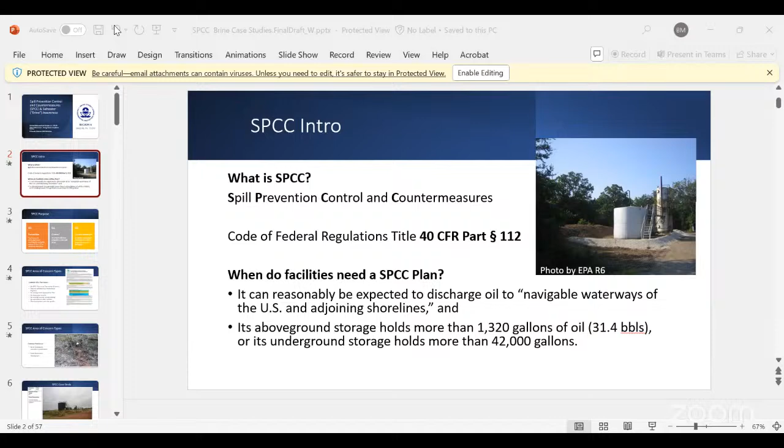You know what I mean? Yeah, I had it turned off in Zoom. It's shut off right there. Back to the screen. Are we better online right now? I think so, okay. Raise your hand or something in the meeting so we can stop. So I think it's yours, Zoom, actually. Muted, or is that phone up here? Or do you have a laptop? It's pulling from right there. Okay. We're using this for the audio, okay, so it's got to come all up. We're using this one speaker right here. Okay, perfect. Well, yeah, just stop us if it gets too much noise in that Zoom meeting.

So what is SPCC? It's the Spill Prevention, Control, and Countermeasures, regulated under Title 40 CFR Part 112. When do you need an SPCC plan? There are two reasons: if your facility can reasonably be expected to discharge oil to navigable waters of the U.S. and its adjoining shoreline. So any water body that usually holds water year round, those are going to be the water bodies that you're going to need an SPCC plan for sure.

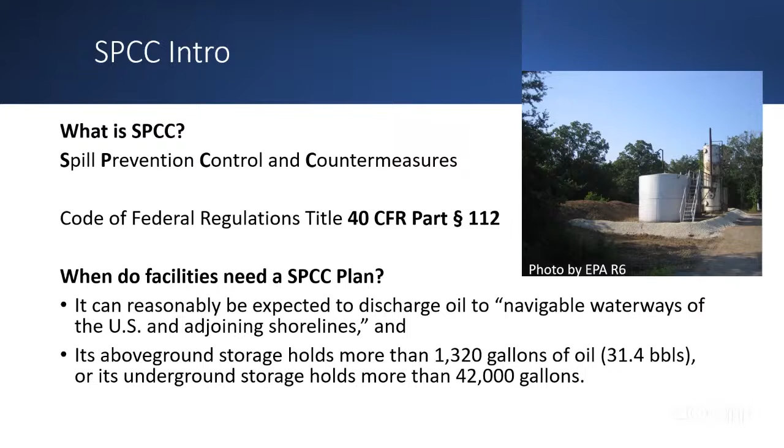And then the ones that are closer to water that's not year round, that's when you're going to have to reach out to the SPCC plan writer, or you can reach out to us as well. The other reason for having an SPCC plan is above ground storage that holds more than 1,320 gallons, or underground storage that holds more than 42,000 gallons. If y'all have any questions, just raise your hand and stop me while I'm talking.

Yeah, there's some that you might have to click twice though.

So the purpose of having an SPCC plan is prevention, control, and countermeasure. Prevention, to prevent oil discharge from reaching the waterway; control, to ensure you have an effective response—say you do have a large spill and an OSC from EPA comes out, they can pull up that plan and know where to respond to the spill, clean it up, and use different locations to clean up, which will be cited in the SPCC plan on where your gathering points are going to be; and countermeasure, to ensure proactive measures, hopefully eliminating having that spill in the first place.

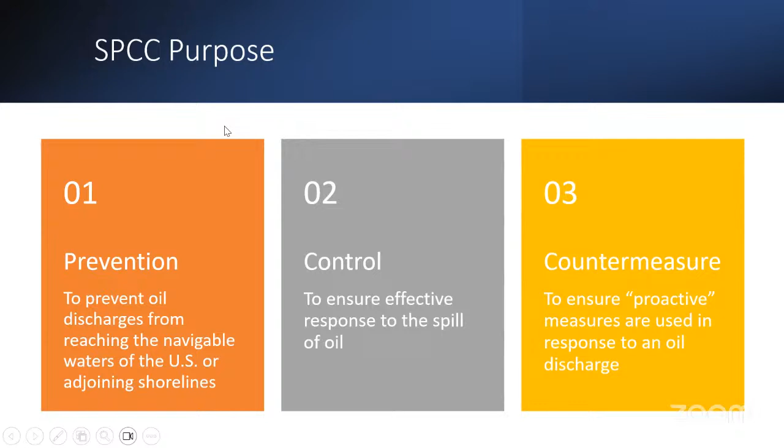So now I'm going to dive into some issues that we see with the plan. Common issues we see are no plan on site at all—we'll show up and they won't have a plan. Usually most SPCC inspections are announced inspections, so they'll give you a call around two weeks ahead of time so you can get your plan set up, and usually they want it sent over to them to review the plan within that two week time frame.

But if you don't have it yet, you have those 2 weeks to get it at the facility by the time they're inspecting it. And then, plan not certified by a PE - later on in these slides I'll have a link to a template plan you can fill out, but you'll still need to get it signed by a PE by the time we inspect it. And no management approval for the plan - that's just a signature you put on the plan. So as long as you go through it all, read all the steps, and get it signed everywhere you need to, that's a small thing we see all the time.

And then records - you have to keep these records, and it states in the plan, for 3 years at a time. So the previous 3 years you have to have records. This one is no inspection record, so that's just a walkthrough. If you're out there every day, you can just choose random days to do an inspection on yourself and have that in your records. Just keep the previous 3 years of that.

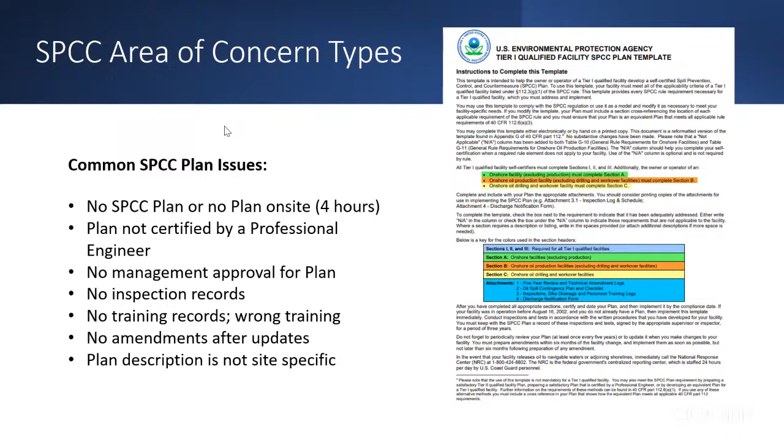Now we'll go to some field issues that we find, and that's no or inadequate secondary containment. A lot of times whenever they're coming to pick up oil, they'll walk over that berm and you'll get a low spot over time, so keeping that low spot filled in before you get an inspection is a big one. Or they'll completely back over your berm to pick up oil and knock your secondary containment down over time. So that's two things right there.

And then having this open drain valve here, this is a big one. This is kind of why we're in the area, with these drain valves you'll have saltwater discharge come from it, or if something happens at the facility while you're not there, you'll have oil come through that. So in the regulation, you have to have it capped with no drips or anything coming from it, and usually you'll have a valve on it too. So as long as that valve's closed and it's capped, then we're all good on the SPCC side.

So if you don't have one of those, you're just doing rainwater by using a pump. That has to be written every time the rainwater is pumped out over the firewall, not back into the system. Yes, I know it'd have to be documented, even though it's just rainwater. Yeah, and that would be something you'd fit in the plan - how you get rid of water from secondary containment. You'd say you pump it out and you're visually inspecting it as you're pumping it out.

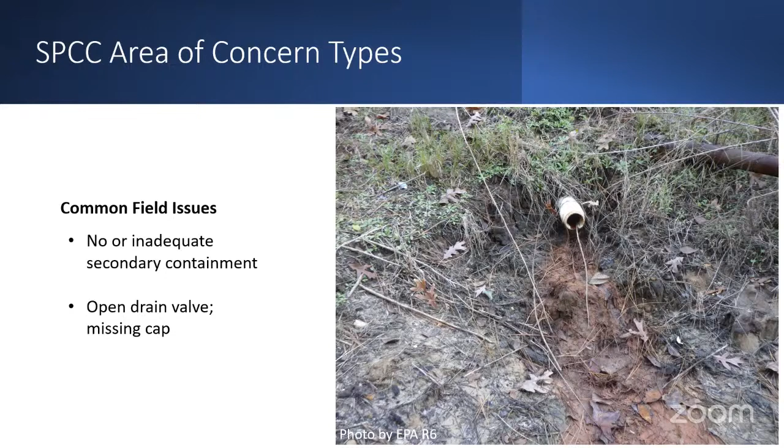Now I'm gonna jump into a case study. This one was in Oklahoma and it just shows a few different ranges of what we're looking for. It'll actually have a checklist on the right side on some of these slides, showing what we marked on the actual inspection checklist versus what's in the picture.

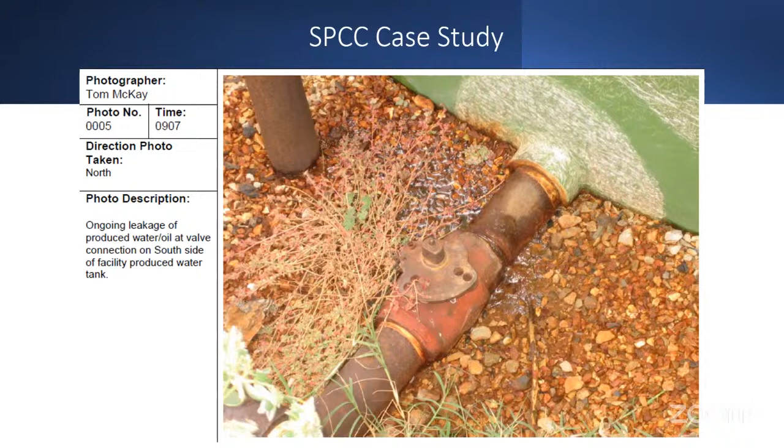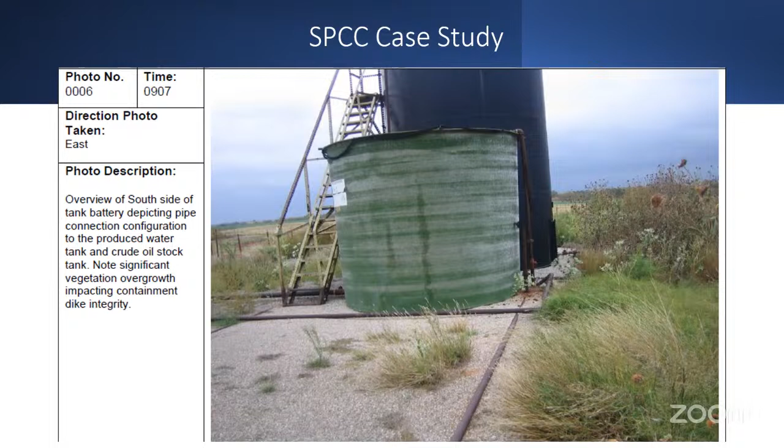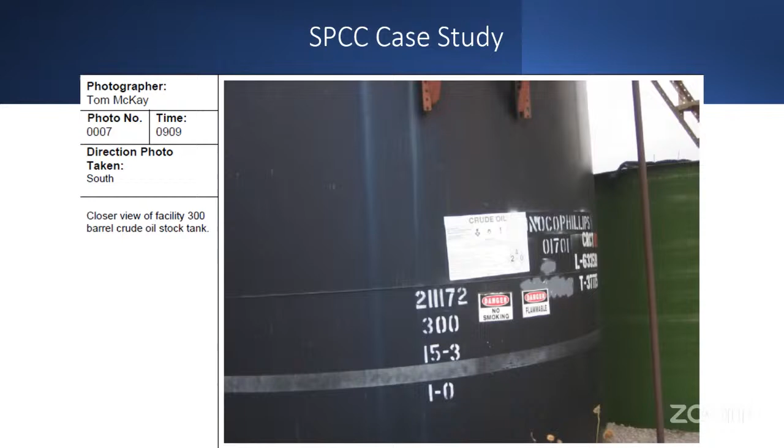We'll look at the largest tank inside the facility, because secondary containment needs to hold the entire volume of the largest tank, so we'll note the largest tank that's inside. There's the ID plate.

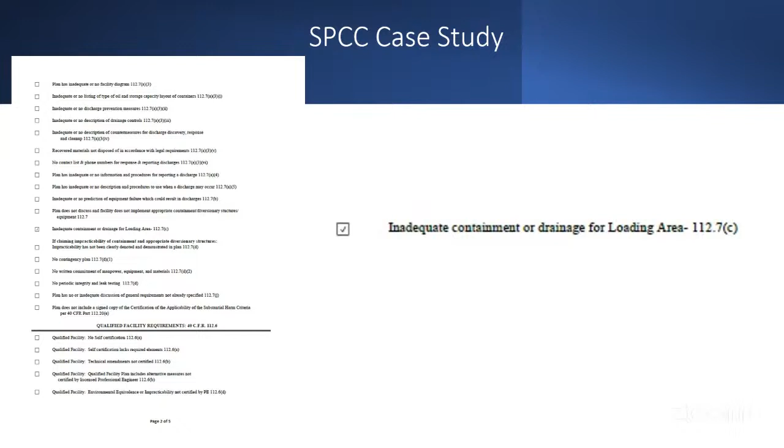And then no inspection records were available for review, so they didn't have that 3 years of records on the inspection. And then no training - that's one you can handle over a quick chat, just write down that you had the training and sign it. Nothing crazy on that either.

And then no training on discharge protocols - same exact type of training, just make sure you have the records for it. And then no training on applicable pollution control laws, rules, and regulations, and/or the SPCC plan.

So whenever you do get your SPCC plan, just go over it with who you're working with, and then sign off on it. And then spill prevention briefings are not scheduled - that's gonna be once a year, when you go over that plan. It can take just a minute, just sign off on it and hold that record.

Excessive vegetation, which affects the integrity—we saw that on that berm. And then walls of the containment system slightly eroded, and we noted that one as well earlier on that corner.

And then flow lines with no secondary containment need a contingency plan and written commitment of resources. So that's going to be an active secondary containment showing that you actually visually inspect those flow lines.

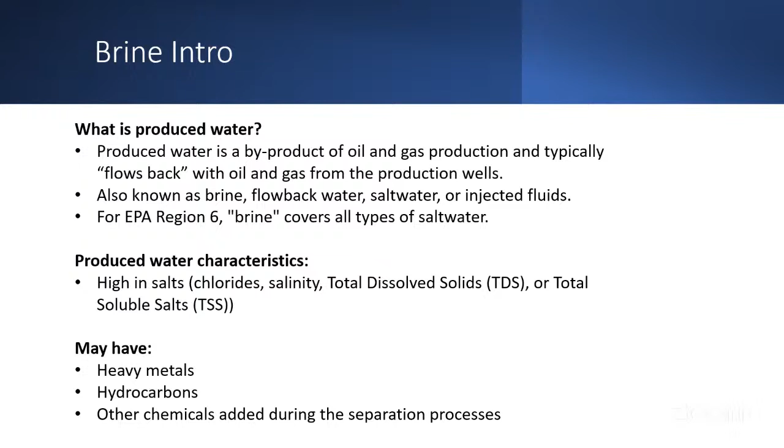And we are inspecting these under the Clean Water Act. So everyone asks, we seem to get that like, AOGC's out here like every other week. It's like, yeah, they have their own state programs and things like that. We're under the Clean Water Act, so oil and gas is not exempt from the Clean Water Act, but as an industry, they're pretty much exempt from permitting.

So to get out of permitting, the industry has to come up with best management practices, and that plan's one of them that says that you'll make sure your releases are reported and cleaned up and all that other good stuff. But you get out of a permit that is binding and has things that can be violations. So that's how I look at it.

This route is, I think it's a good deal. Ag is almost completely exempt. So look at it that way. There are things that are exempt from the Clean Water Act or from permitting because of their use to the country. I like to eat, so I like my farmers, and I like to get around. So there are exemptions that I think are necessary.

So that's what we're here for, is unlawful discharges of contaminated pollutants. That's what it's about. This is just straight up stormwater, we wouldn't have a reason to be here. And if there was straight up no discharges, there probably wouldn't be a reason.

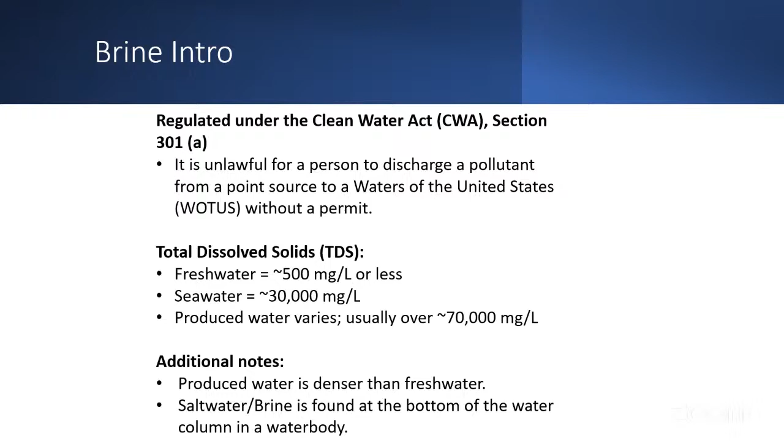It's denser, so it'll sink. So most of the time if you're doing a sample, you don't want to stick your little dipstick reader, your probe right at the top - you're just gonna get fresh water that flows over the top. This stuff sinks to the bottom, so you gotta get on the bottom to see what you really have. It'll flush out, but I've been to places where I'll do a test, put it in at the top, and you can steadily see it increase as it gets to the bottom. It just sinks down there.

So the impacts of saltwater brine, like livestock, I don't want to drink that stuff. If it's above 1,000 milligrams per liter, it can have negative effects. I think they're pushing livestock and wildlife because those are the things that it can impact, but really it's aquatic systems as well - our fish and our macroinvertebrates, our drinking water supplies. If you contaminate your drinking water supplies, it just takes more to treat that, and then your water prices go up on your potable water.

And then it can affect stream segments. So anybody that discharges to that, like somebody that's permitted, their permit limits can go up because they then have to treat it because it's already contaminated, so they can't add to it. So you can have segments that are affected versus the whole stream. And then groundwater concerns as well.

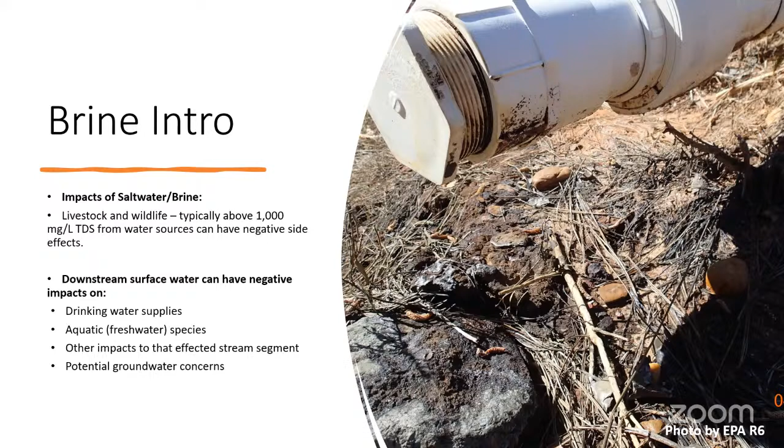You don't want your groundwater to get contaminated. It's real similar to your drinking water supply.

Here's my case study, and this is New Mexico. It's a little bit different than what we see down here, so I might make some sidenotes on it, because this is going to be a mobile source. This was a tanker truck that rolled over in New Mexico, and New Mexico isn't delegated, which means the state doesn't have control over their environmental laws and permits. So EPA is the one who has to inspect and do things in New Mexico. Arkansas is delegated, Louisiana is delegated, Texas is delegated, Oklahoma, other than tribal lands, is delegated. But New Mexico is the only state in Region 6 that's not delegated yet.

So this is the case study. We got 65 barrels of produced water that entered Black River. This is one of the rare instances of a perennial stream in New Mexico. Michael worked this one, got the NRC report, and went to work it about 5 days later.

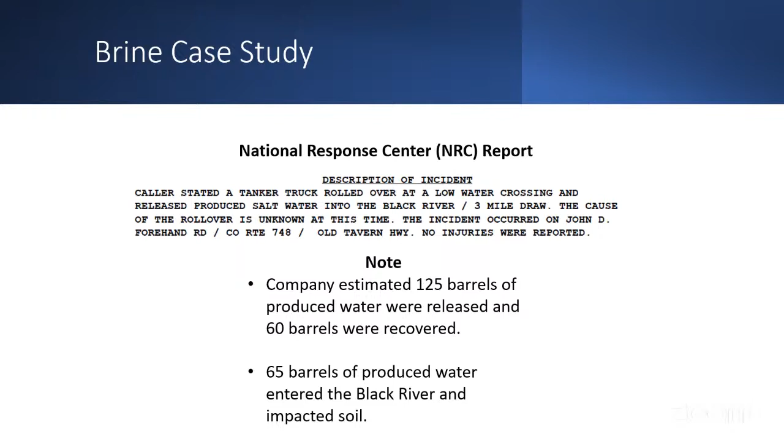Or was it the one that was in the curve? This was a sharp curve, same company, before this one got stuck going up the hill. It was a steep hill, in Oklahoma. Same company, yeah. Bad. And they dumped it all out in the creek. So this one was going around that corner, doing like NASCAR, and dumped the whole truck. The whole truck turned over. We didn't put anything in Arkansas on this one.

Next slide, truck dumps over. These case studies are fun because you'll get to see what we get to do with these.

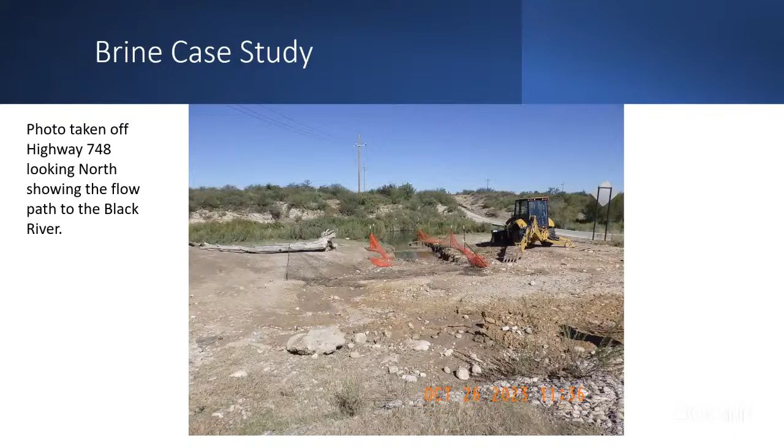There's more of it where they got in there and excavated some area. More excavated area. The part we get to is, we stick our little TDS meter in here. Y'all don't buy this meter, by the way, it's like $10,000. Don't do that, get a little dipstick one, it's like $30. This is a pretty sweet meter though.

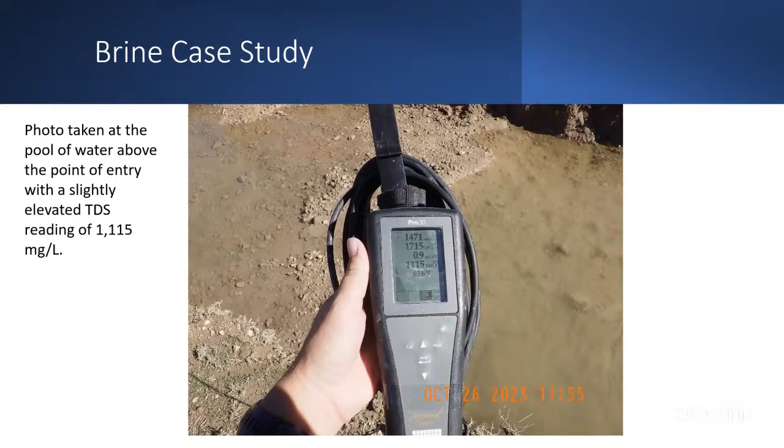So we get what we call a point of entry, you stick your probe in there, and let's see what we got going on here, what is it, 5 days later? He gets this reading down at the bottom, and that's 1,115. So we know there's an influence there.

This area is kind of interesting, it had an ash influence, which made the pH or something weird too, in the background. TDS was also really high in this area. Normal freshwater, like here, I'll see 500 and sometimes lower for the spring. I'll see like 25, like we saw today, there's nothing. But here, the background was still like 1,000 or somewhere close to it.

These are photos that we would take, so we got that point of entry, and we always try to keep organized. We'll take a picture upstream and a picture downstream. This is just the flow of what you'd get if you inspect something like this. We'll always show you upstream and downstream with the reading taken at that particular location. Michael took several of these, walking down the stream to get to the low point, and then he does a background, which was not impacted by the rollover by any means.

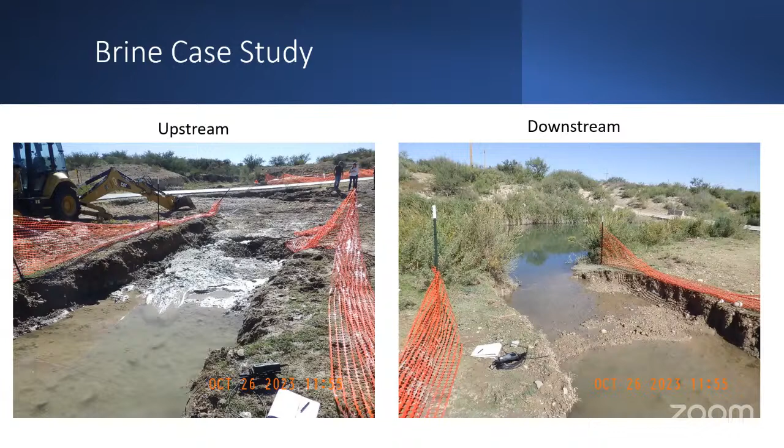Jerry, you gotta get out of here. All right, I'll see you. So y'all watch these.

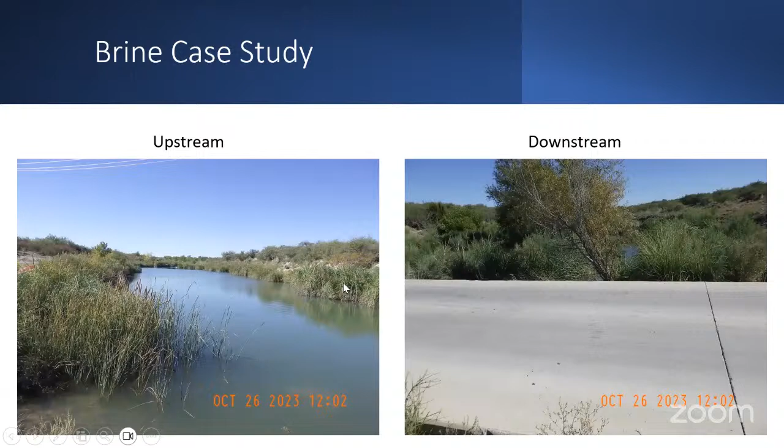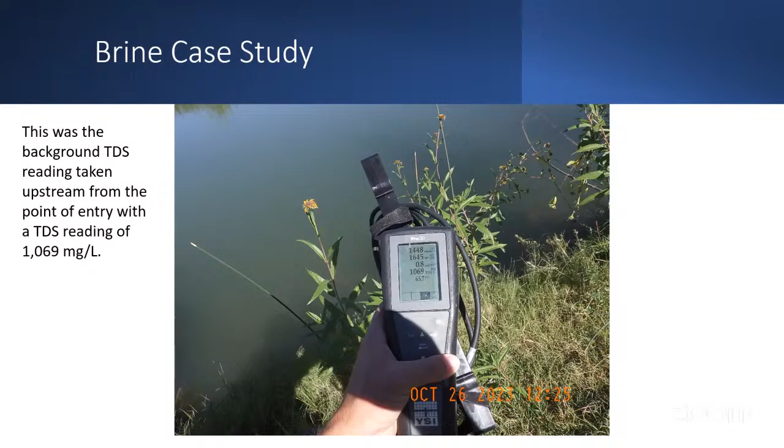Here's another one, you've gone down, but it's gone down a little bit, now it's 1,069. Again, upstream and downstream at this location. Going down, it's pretty similar, that one is 1,065, real similar. Taking those pictures upstream and downstream, still real similar background. Dilution on this one, upstream, downstream. Okay, duplicate.

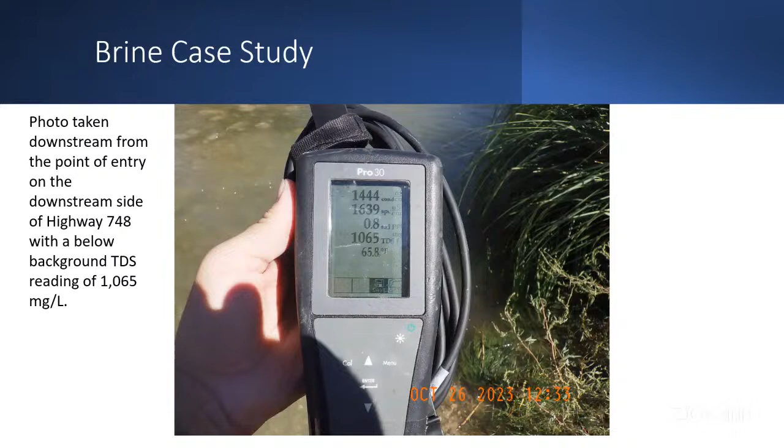You're just walking down a creek after the point of entry. So as a reference, let's say we've got a drain pipe with a pool of water under it, we'll stick the meter in there. I got one that was pretty high, about 30,000. Then you walk down, and it gets less and less and less, and you see where your impact area is at. Right before that impact area, upstream of it, we'll get a reading, and that's your background. So if we find that, we'll have you clean that creek segment, usually with a vac truck, flush it, and get it back to that background measurement.

Or hope it rains before you have to. Flush it just means bring fresh water to dilute it down, but back it up at the bottom first, so have a catch point. Usually a lot of people will build a temporary dam just to stop it, especially if it's not already in a perennial stream. Build a temporary dam, back it up, and then flush it, usually twice or sometimes more to get it all out.

The method for getting 99% is usually three flushes, but we'll even tell you where the segment stops, and it's usually pretty short. So don't think you're going miles down a creek, unless you didn't catch it right away, and then we go miles. We've gone miles down a creek too, but as long as you get it to that background level we find, that's pretty much it.

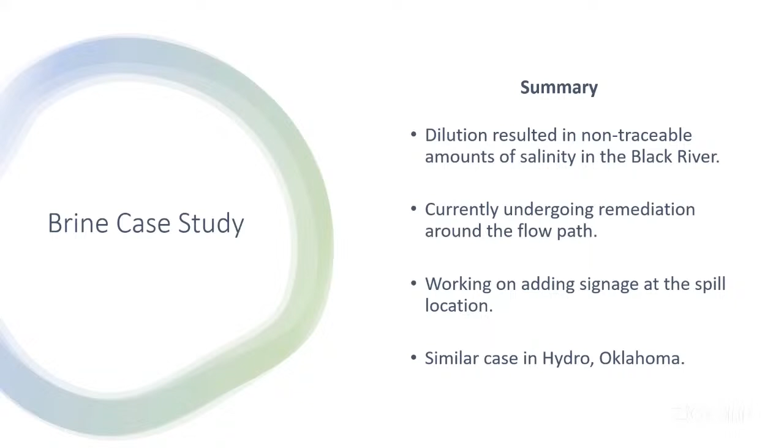So most of the stuff around here is going to be a stationary source. That'll give you an idea of what we would do. We would start at the point of entry and just go down the creek until we found where it levels out, where it's either background or it's not being contaminated yet.

But this next section, this is spill reporting. And this is the thing I know y'all hate, paperwork, but I'm going to tell you, this is when you have to report crude oil. Keep in mind, if it touches water, you got to report it. You got to report it at the federal level, not just the state level, but at the federal level. That's a big deal.

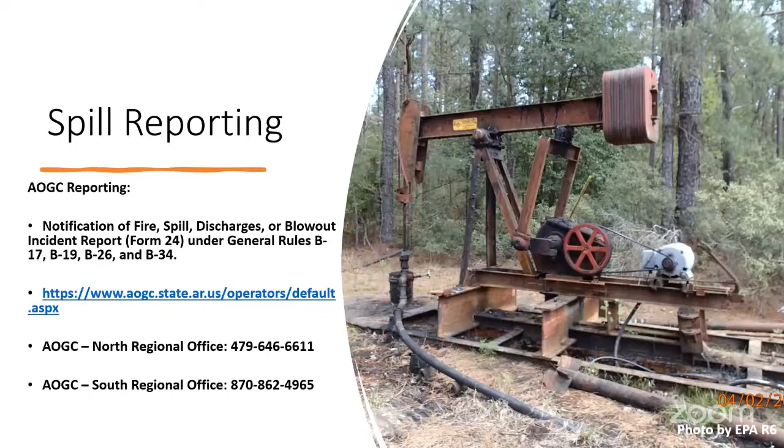Did this not show the Form 24? I think so, maybe they took it out. I had a picture of it where you could kind of see the little tab. It's a fillable form, one of those where you just fill in the buttons and it submits it for you. It's a good form.

Then there's reporting for ADEQ. ADEQ also requires some reporting under Rule 1, Rule 2, and Rule 6. And here's ADEQ, you can have federal and state permits. So ADEQ, or Arkansas, is delegated to write and permit the NPDES, the National Pollutant Discharge Elimination System. That does not apply to anybody in this room unless y'all are commercial. If you're not commercial, don't worry about that. And then they just have some permitting for stormwater, what that's about.

Is all this available on the internet? It is. On one specific website? So AOGC has a website that can get kind of confusing, but if you search AOGC you can get to their legitimate website that's great to use. Same for ADEQ, but be sure to put ADEQ Arkansas, because you can also get Arizona DEQ. So put ADEQ Arkansas and it'll pull up. I would go to Office of Water Quality, that's what that would fall under for ADEQ.

Go back to that other slide, please. Their rules are up at the top, it's a brown bar, I see it visually. The rules are up at the top in a brown bar, but Office of Water Quality will also have some of that stuff.